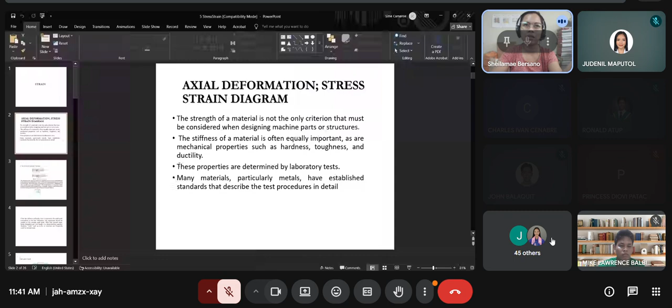So axial deformation, stress-strain diagram. Basically what we'll discuss now is just the axial deformation. Later, in our next meeting or succeeding discussions, we will discuss uniaxial, biaxial, and triaxial deformations. For now, we'll discuss the axial deformation, wherein we just have to consider uniaxial deformation.

For example, if you have a certain steel or a certain member of the structure, like a beam or column, if you apply an axial load to it, it will also be exposed to axial stress. Since it's exposed to axial stress, there's possible axial deformation, and it has something to do with the direction of your force.

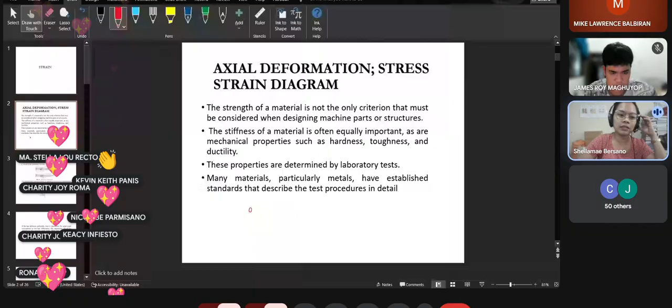Thank you for informing me. So again, strain is the effect of stress. By the relationship, due to Hooke's Law, stress is directly proportional to strain.

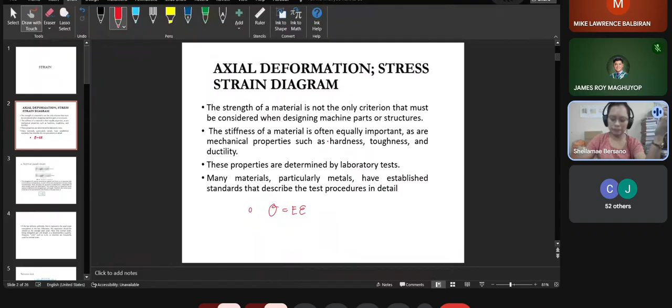This has already been derived in your activity last time. Again, if you have axial deformation, there's a developed axial stress, and it's evident in your member. For example, if you have a rod, and you exert an axial load on it, that means it will pass through or act on your member parallel to its axis, which is the major axis of your member. It's called axial load because the load is parallel to your axis. If this is a normal load, it could be in tension or it could be in compression.

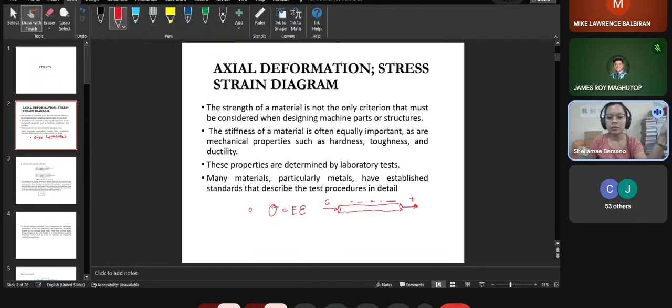So of course, let's just assume this is subject to a tensile load. So axial load could be in tension or could be in compression.

So if I pull it, there's a change in your length, right? It will elongate. If it elongates on one side, the difference now in your length... The total deformation is equal to your new length, L prime, minus this, your original length. And this change in your length is what we call deformation.

So the effect of this, class, is your strain. The strain is equal to the deformation over the length. So you can derive it like this.

Strength of material is not the only criterion that must be considered when designing machine parts or structures. The stiffness of the material is often equally important as mechanical properties such as hardness, toughness, and ductility. So class, when analyzing materials or deciding, we should not only consider how strong your material is. It also has something to do with the stiffness, or the resistance of your material against deformation. Because even if it's very strong, if it deforms substantially due to the presence of load...

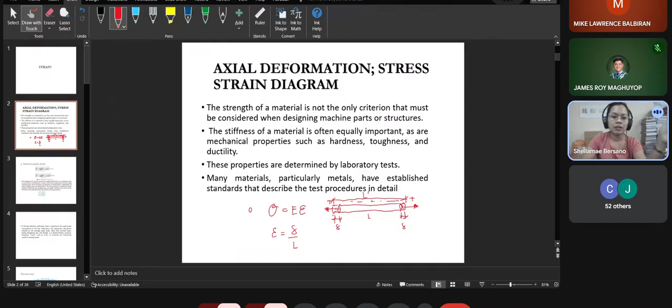The normal or axial strain - for the normal condition, no load has been applied yet. This is the original length, and this is the undeformed portion of your material. Once axial load is applied, axial stress develops, then later axial strain develops. So there is already a deformation in your material, and elongation may be caused.

Elongation is denoted by the Greek symbol epsilon - I mean, deformation is delta. Elongation is caused by the applied axial load or any expansion due to increase in temperature. By the way, elongation sometimes has the symbol delta, like a change in length or change in height. That's the elongation symbol.

Strain describes the geometry of deformation independent of what actually causes the deformation. Normal strain is denoted by the Greek symbol epsilon, defined as the elongation per unit of length. Therefore, normal strain in a bar in the axial direction is also known as axial strain, represented by this equation: strain or epsilon equals deformation over length.

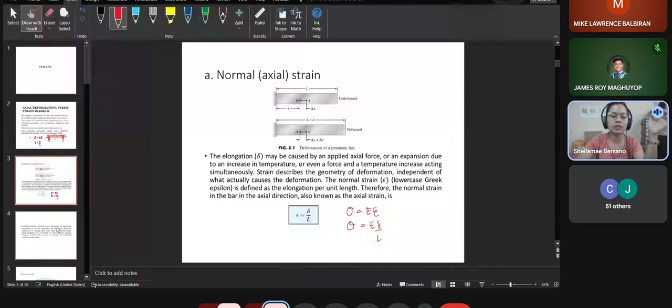This seems to match the presentation, so I'll just show that.

If the bar deforms uniformly, then it represents the axial strain everywhere in the bar. So that strain, it is experienced all throughout the length of the bar - it's not only at the ends that it takes effect. It is uniformly distributed everywhere in the bar. Otherwise, this expression should be viewed as the average axial strain.

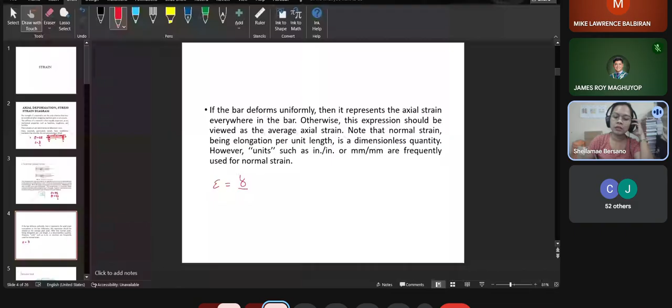Note that normal strain, being elongation per unit length, is a dimensionless quantity. Since strain is deformation over length, and the unit of deformation could be in mm, and your length could also be in mm, it just cancels out. Other reference books just write it as is - mm per mm or inch per inch. It still cancels out, simply meaning that normal strain is dimensionless.

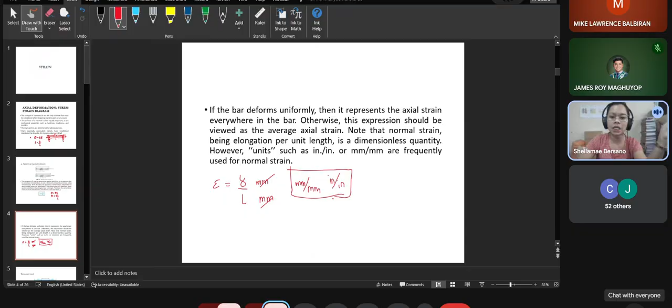Then, tension test. This is the standard tension test used to determine the yield strength of the material, or to get the allowable stress.

In the tension test, the specimen is placed in the grips of the testing machine, so that it is held firmly, then pulled with a tension load. That is why it is called tension test.

Two marks are scribed on the specimen to define the gauge length. This length is marked to label the original length before you apply the load. After labeling it, you exert a load slowly.

It's not an abrupt loading, and it must be at a constant rate until the specimen ruptures. Before the specimen is cut at any point, it undergoes changes. So if you apply a load P, you watch the material to see if it elongates or not. If there are changes in the length, you record it in your diagram.

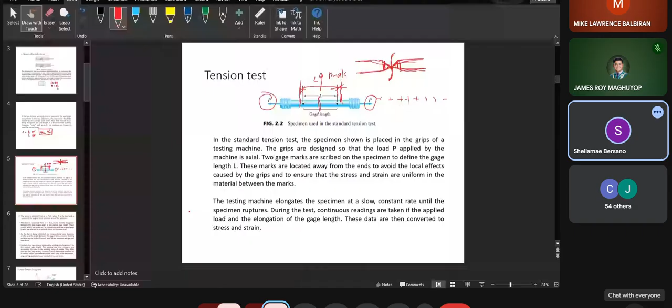Similarly, a true strain is obtained by dividing the elongation by the current gauge length. The nominal and the true measures are essentially the same in the working range of metals. They differ only for very large strains, such as occur in rubber-like materials or ductile metals just before rupture. So with only a few exceptions, engineering applications use nominal stress and strain.

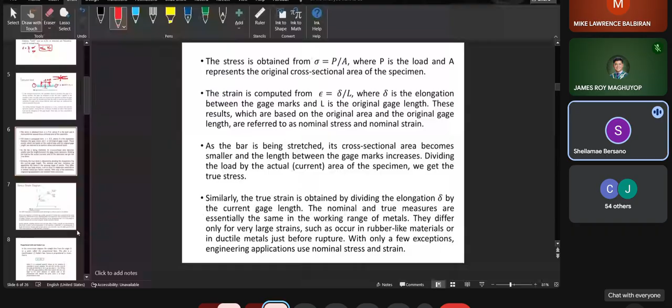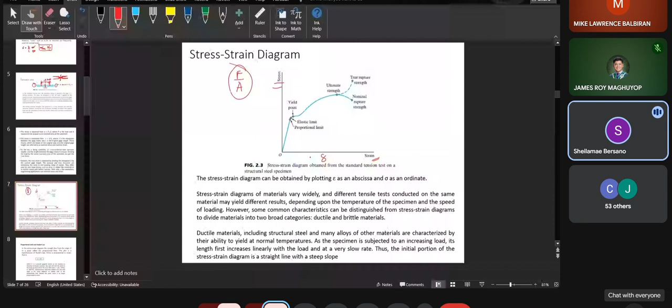Since stress is force over area, you can obtain this from the tension test. The strain is represented by the deformation, that is, the deformation over the length. So if we graph this, as you increase the load, the strain that develops is shown accordingly.

When the load is applied, causing deformation or strain, and then released, the material returns to its original length. This part is called the elastic limit or elastic state.

So the stress depends again on the load applied in the tension test. Once the load increases beyond this point, the material no longer returns to its original length. This is where deformation starts until it reaches the ultimate strength, which is the maximum deformation before it ruptures.

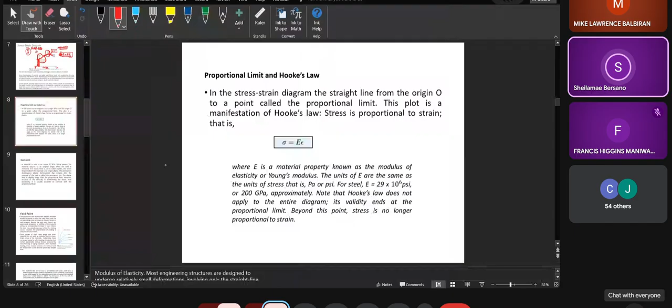A material is said to be elastic if after being loaded, the material returns to its original shape when the load is removed. In a tension test, as you constantly increase the load, you will eventually release it. Once you reach the point where the material no longer returns to its original shape after unloading, that is the time it has passed the elastic limit.

Elastic limit, as its name implies, is the stress beyond which the material is no longer elastic. The permanent deformation or plastic deformation that remains after removal of the load is called the permanent set. Once you pass the elastic limit, your material undergoes permanent set, meaning it will constantly experience deformation until it reaches its limit.

The elastic limit is slightly larger than the proportional limit. However, because of the difficulty in determining the elastic limit accurately, it is usually assumed to coincide with the proportional limit. If you look back at our diagram, before reaching the yield point, the elastic portion looks very narrow. Since it's not easy to identify exactly what the elastic limit is, it is often assumed to be equal to the proportional limit.

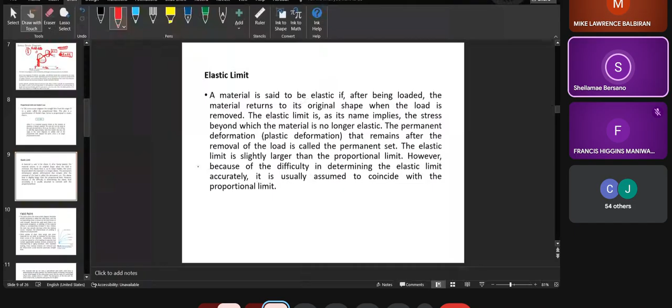That's for the elastic limit. For the yield point, this is the point where the stress strain diagram becomes almost horizontal, and is called the yield point. The corresponding stress is known as the yield stress or the yield strength.

Beyond the yield point, there is an appreciable elongation or yielding of the material without a corresponding increase in load. Indeed, the load may actually decrease while the yielding occurs. However, the phenomenon of yielding is unique to structural steel.

If you observe structural steel, it still has high resistance against deformation. The load keeps increasing before it curves downward, meaning it has high resistance against deformation, and that is a good property of steel — it has high ductility.

But other grades of steel, like steel alloys and other materials, do not yield, as indicated by the stress strain curve of those materials. What does this mean? After applying a load, if you observe here, it's still linear. If we look at it, it's assumed to remain linear until it suddenly breaks. So it has a small yield point, unlike steel.

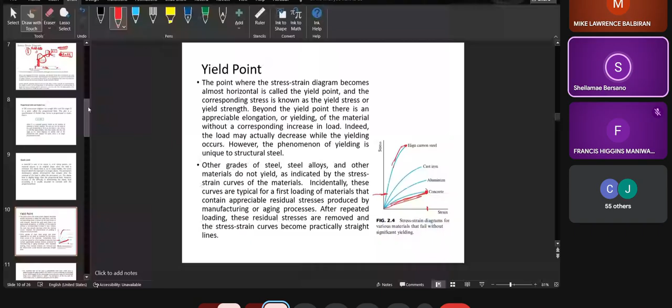Straight again — that's directly proportional. For materials that do not have a well-defined yield point, yield stress is determined by the offset method. This method consists of drawing a parallel line to the initial tangent of the stress strain curve, starting at a prescribed offset strain, usually 0.2%. This value plus your strain of 0.002 is used in the RCD method.

You'll apply this in concrete design, so again we will not focus much on this here. The intersection of this line with the stress strain curve is called the yield point. The yield point is identified at 0.2% because it's very difficult, though not impossible, to identify exactly where the yield point is. That is why it's assumed to have an offset of 0.2%.

This value or factor is used for concrete. For steel, you can identify the actual yield point, but for concrete you cannot, so you assume the value using the offset method — that's the 0.002 offset.

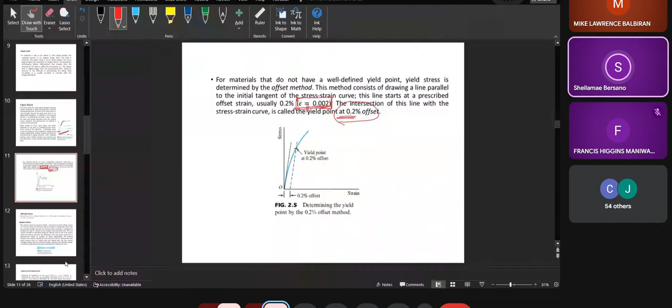Then, ultimate stress. The ultimate stress, or the ultimate strength as it is often called, is the highest stress on the stress strain curve. That's the highest strength induced in your specimen before it ruptures. At this point, since it's already the highest, there's no need to add more load to break the sample - that's already the maximum. That's why it is called the ultimate - the highest stress on the stress strain curve.

And the rupture stress or rupture strength is the stress at which failure occurs, and for structural steel, the nominal rupture strength is considerably lower than the ultimate strength because the nominal rupture strength is computed by dividing the load at rupture by the original cross-sectional area. Thus, the true rupture strength is calculated using the reduced area of the cross-section where the fracture occurred.

The difference in the two values results from a phenomenon known as necking. As failure approaches, the material stretches very rapidly, causing the cross-section to narrow - the portion becomes smaller. If the cross-sectional area is smaller, the stress becomes larger, since stress is force over area. So if your area is smaller, your stress becomes larger.

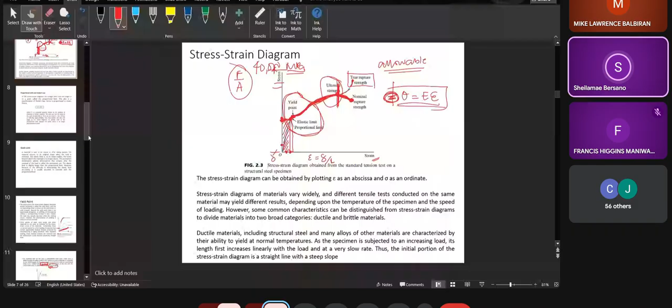That is why in the stress strain diagram you have here the true rupture strength, which is the imaginary or assumed stress considering the actual dimension at the point of breakage - that is also called necking. At that point, as failure approaches, the material stretches very rapidly, causing the cross-section to narrow. Because the area where rupture occurs is smaller than the original area, the true rupture strength is larger than the ultimate strength. However, the ultimate strength is commonly used as the maximum stress that the material can carry.

Once it ruptures, it can no longer carry your load, so that is why it's not used as the ultimate strength. Because at the ultimate strength, that is the part of your analysis or laboratory test wherein you note the maximum load applied before it ruptures. That is why we have to use ultimate stress as the maximum stress.

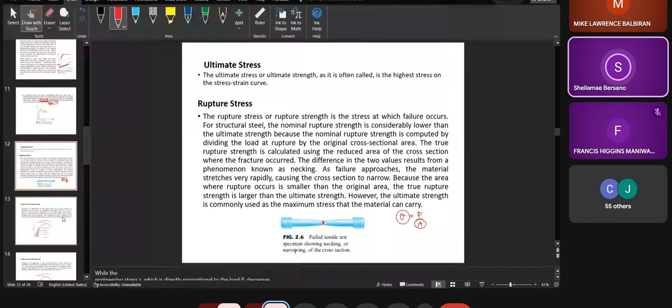Then we also have here the modulus of resilience. This is the work done on a unit volume of material as the force is gradually increased from 0 to P, in Newton meter per cubic meter. This may be calculated as the area under the stress strain curve from the origin O to P up to the elastic limit.

Basically class, when you are resilient, that is the ability of something or someone, even if exposed to a lot of stress and forces, to have the ability to return to its original state. That is why the modulus of resilience is this shaded part from this point towards the proportional limit. Because at this part, your material is still capable of returning to its original shape. That is why that is called your modulus of resilience, from O to P. If your material is resilient, it is still capable of going back to its original shape - that's resilient.

Then we also have here modulus of toughness. When you say toughness, even if you deform, you don't break - that's being tough. Modulus of toughness is the work done on a unit volume of the material as the force is gradually increased from 0 to the rupture point. This may be calculated as the area under the entire stress strain curve from 0 to R.

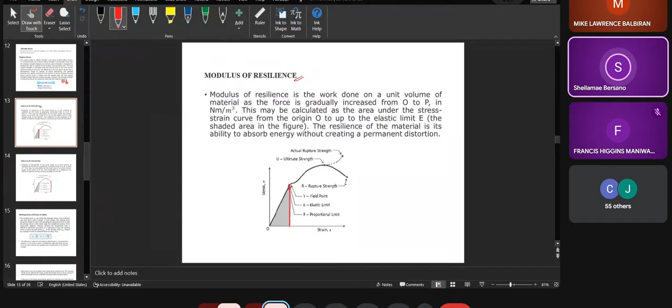Then we also have working stress and factor of safety. The working stress is also known as the allowable stress. This is the maximum safe axial stress used in the design. So in most designs, the working stress should be limited to values not exceeding the proportional limit.

That's the theoretical approach. The working stress should not exceed this, because if it does, it reaches the yield point. So that the stress will remain in the elastic range. However, because the proportional limit is difficult to determine accurately, it is customary to base the working stress

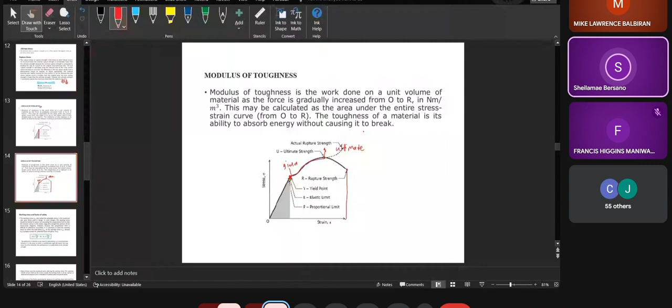on either the yield stress or the ultimate stress. It's impossible to determine these values exactly, but in most materials, the yield and ultimate strength are already identified. For example, if you use steel, it has its own yield strength and ultimate strength. So in most designs, they use values of yield strength or ultimate strength, but they apply a factor of safety.

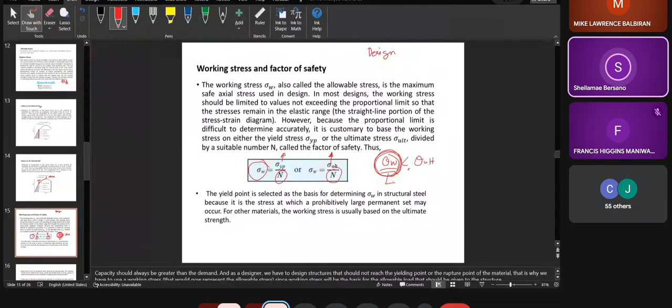So if your working stress is small, that's what happens in class. We have small design criteria. We have the ultimate strength of the material, which is the largest stress it can handle. The yield strength, for example, is where the material starts to yield but has not yet reached its ultimate strength. If you divide your ultimate strength by the factor of safety, something happens to your working stress. The working stress would be less than the ultimate strength, and also less than the yield strength.